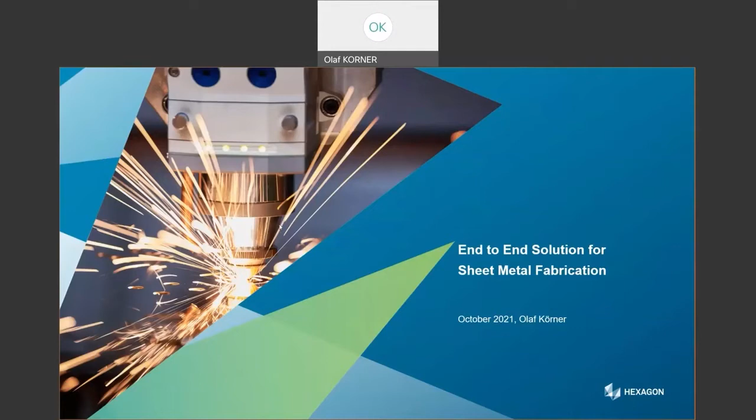So what are we going to go through today? First of all, I'll explain who we're aiming this at, who should be listening to this and who should not be. Then we'll look at the business challenges that we find as Hexagon in the sheet metal world. And then we'll show you how we are trying to address these issues using our product portfolio at Hexagon. Then we'll do a quick recap over the actual products you've seen in that end-to-end solution. And we'll talk through some of the key benefits you'll gain from this solution.

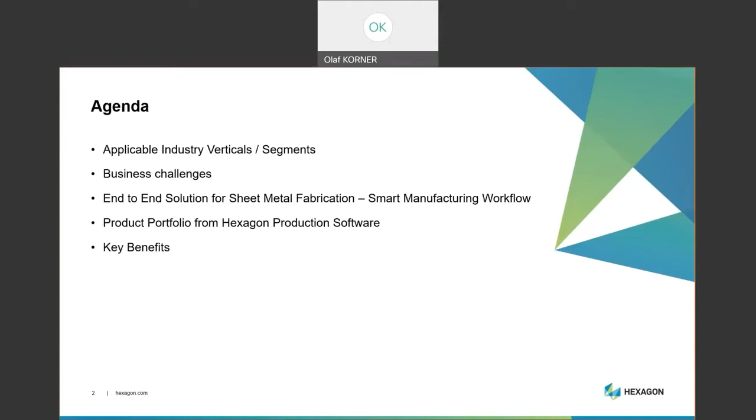So, who is this aimed at? Who are we looking for in the market when we talk about sheet metal fabrication?

Just check, I think there's a message coming in. Okay, who are we talking to? Hope you can all hear me, by the way. I'm just checking whether there's any messages coming in.

It's looking good. Okay, so lots of our customers are in, for example, industrial equipment, such as kitchenware, air conditioning, air cooling and heating, general electronics enclosures. We're aiming for those. Another large group that we find is agricultural equipment and automotive. There's a big group of our customers in that area. Aerospace, of course, medical equipment, oil and gas, and not to forget anybody who's subcontracting in any of those areas, we're looking after as well with our end-to-end solution. So quite a broad spectrum, but they're basically combining sheet metal or tube parts into assemblies and finished products. That's who we are trying to serve.

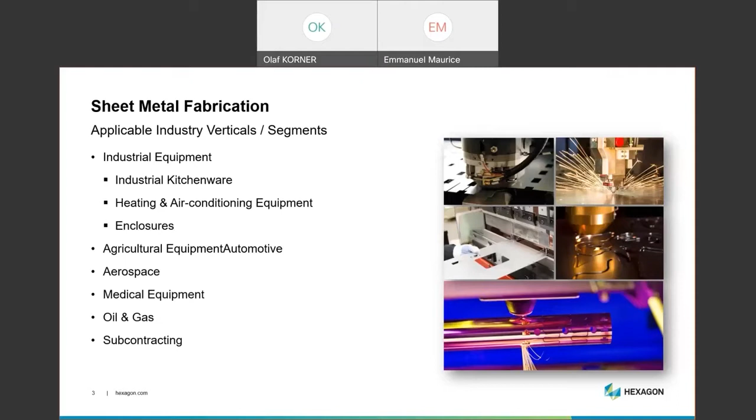So when we look at this manufacturing world, the sheet metal fabrication, we see all these business challenges coming up. We all face shortened lead time. We try to reduce prototypes. We try to eliminate manual operations and free up human resources through automation. We try to reduce rework, so increase the quality or make sure that the quality is predictable and consistent. We try to capture a lot of the skills into our software from the people, so that this skill can be transferred successfully to other members of staff. And also we see that in the sheet metal world, people have to respond to changes very, very quickly. All our solutions are trying to address these challenges and help businesses with them.

And in the sheet metal world, these challenges come up in different forms. So we try to listen to what you're dealing with, what you're trying to deal with, and come up with solutions that genuinely help.

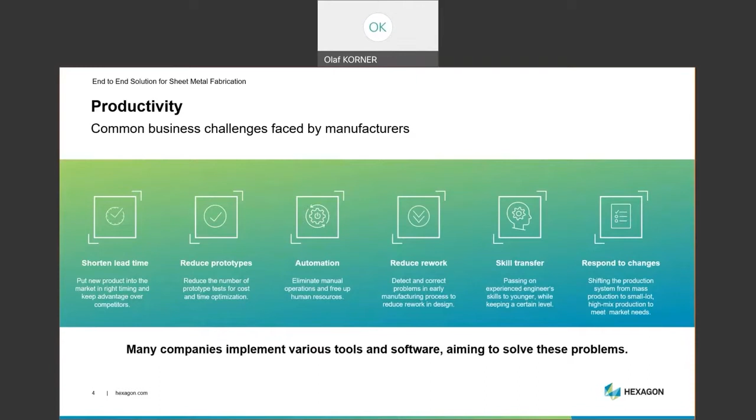So when we talk about this end-to-end solution, we have the following in mind. We're not just a CAM system trying to run your machine. Of course, that's where we come from, that's where we have a large and big experience. But we're trying to capture more of your workflow and help connect those workflows together.

So when we talk about the end-to-end solution for sheet metal fabrication, we do include the first moment a project comes into the company. That could be a phone call, it could be an email with some 3D files or 2D files and a description. Something enters into your company, and we use WORKPLAN to capture that information. Who sent it to me? What did they send me? Did they send any geometry, any files, any indication of a lead time, any quantities, any particular material requirements, anything that's useful to capture at that early stage, we're trying to capture in WORKPLAN. Just to make a record of what's happening.

And then we start preparing for manufacturing. Now, the initial preparation is to see what the customer's actually sent us. Has he sent us DXF files, DWG files, step files? What have we got, and can we do anything useful with them? We try to analyze that as quickly as possible using our product called Designer, just to see whether we need to ask the customer more questions or whether we can actually make a judgment on whether we can do the job.

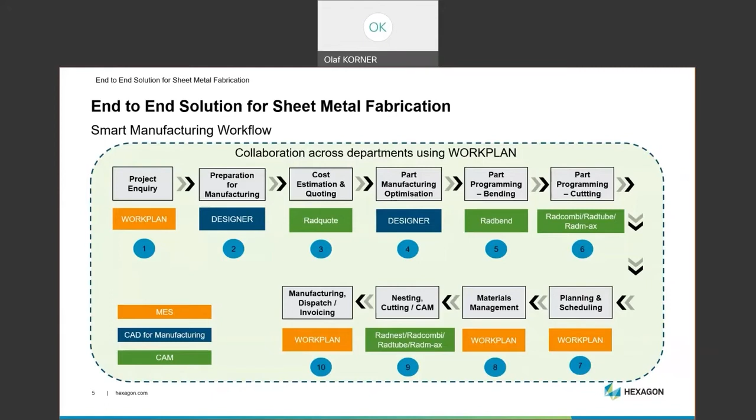So, Project Enquiry - this is like I described earlier. We receive something, I don't know, it's a phone call or an email, hopefully with some geometry, even more hopefully, and any indication about materials, quantities, any constraints. Maybe the material has to be absolutely scratch-free, or anything the customer has told us, including anything about the due date that he is expecting. All that is information that we need to capture.

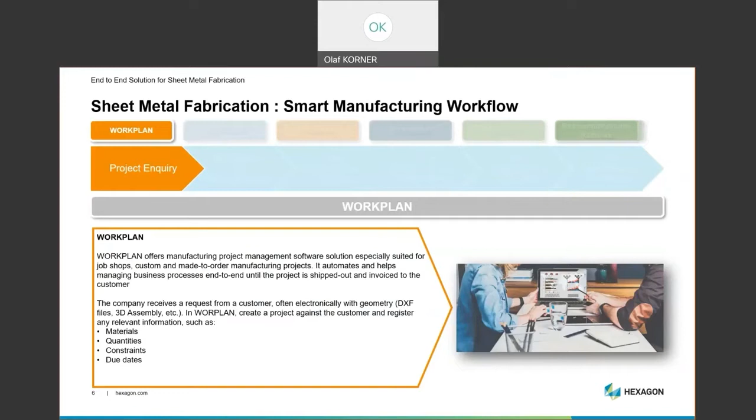And we do that as soon as possible inside WORKPLAN, so that everybody in the organization automatically knows that this work has come in. We haven't analyzed it yet, but somebody is talking to this customer and working on it. And this is a video of what this looks like.

So this is where the project inquiry comes in. We're starting up the WORKPLAN software and logging in. Then we create a project structure, and the most important thing here is choosing the customer we're doing this for - it might be a new customer or an existing customer, it doesn't really matter.

Okay, and maybe the customer's given us a reference number that we could use and refer to. And we're going to take those and assign people to look after this project. The sales manager checks the shipping address, or if necessary, updates it.

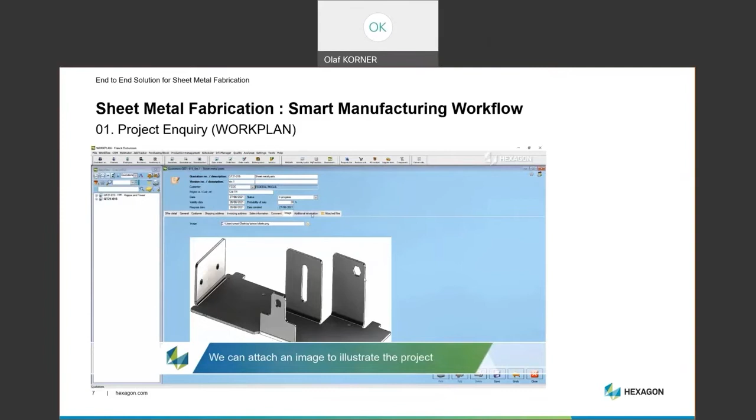And any comments that we can add, so maybe the customer has indicated something about the project that we didn't know about. Anything that helps, we attach - any PDF files, any files that have been sent, any images that will help us recognize this project. We add these, and we can customize these fields as well. If there's anything important to track during the run of this project, we can capture that.

Okay, so we're quite flexible. It's a database system that can be configured to suit you. So that means we now have a project on our hands, and we've captured all the information in WORKPLAN, and we can continue - we can investigate and see whether this project is worth pursuing for us.

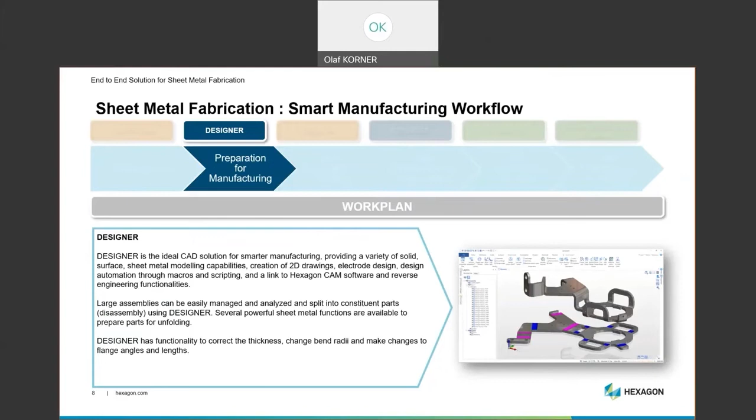And that's what we do in Designer. We try to graphically view this project, and in this case, in the screenshot, you see a single part, but it could be a large assembly, a medium assembly, an assembly with sheet metal parts, but also with tubes or any screw fixings. It doesn't really matter what's in there, but we want to have a look inside Designer to see what the customer sent us, to see whether we need to ask additional questions.

That's what we call preparation for manufacturing. Do we have, in theory, the information that we need to produce?

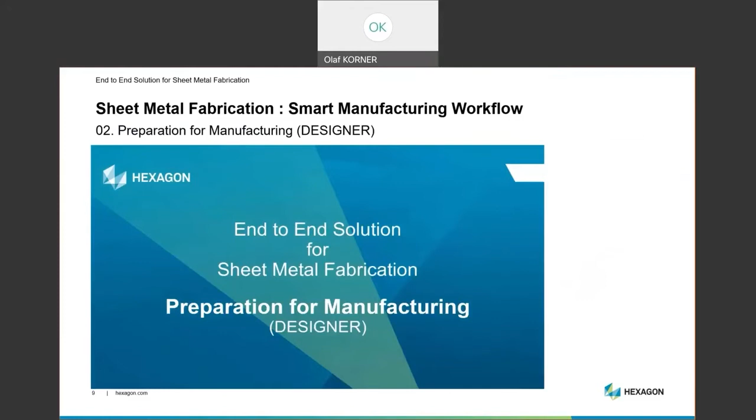Okay, and in this case, we've made an assembly with a hopper and a tower, tubes, plates, fixings in this assembly. And Designer is really good at tidying up and analyzing the structure of this assembly. So even if I have to manually change some of it, I can very quickly focus and create sub-assemblies, so to speak, in Designer to help me manage the information in here.

Okay, what I'm going to do here in the example now is just focus on some of the sheet metal items and make sure that they've been designed properly, that I can unfold them, etc., just to eliminate any problems very early on.

Remember, this is just at the inquiry stage. We haven't told the customer that we're going to do it. We haven't told them how much we're going to charge them. This is just investigating whether we have something on our hands that we can work with.

And that includes the materials. Okay, we need to look at these parts with their material information and see, okay, we can make this material, or maybe it's too thick, or maybe we've never cut this material. Okay, we need to know this up front before we tell the customer, A, whether we can make this assembly for them, or B, even how much it's going to cost them.

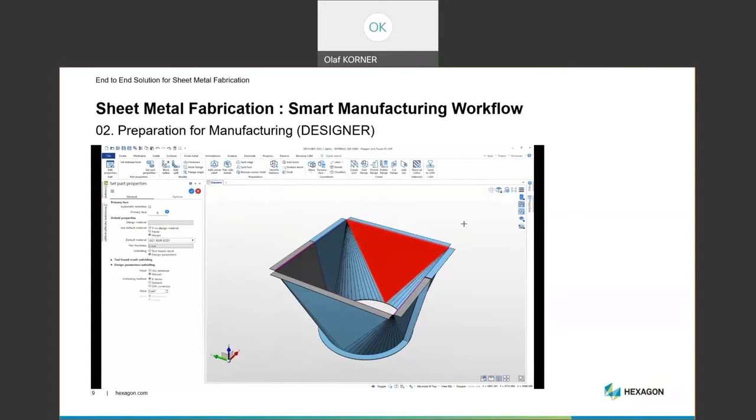Okay, and that's what this stage is about - just indicating and showing and checking what we've received. And the more the customer puts in, so if he sends us a SolidWorks file or a step file with all the materials set, then we will use that. And if we've set up the Designer system in such a way that matches what the customer uses, or roughly matches, then we can automate all these steps.

Okay, and then this step is just a button click away, and it gives us any messages about problems that we might have. Okay, so this is just a check of some of the parts, just to see whether they unfold correctly, because these cones are usually the difficult ones to work with.

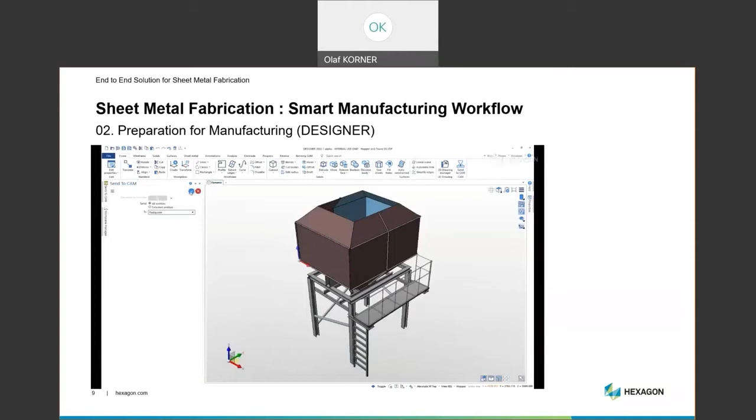Okay, and when we're happy enough in this assembly, we can then send the data into Radquote. And Radquote is the system where it's just going to have a good look at these parts and see what it will take to make these.

Okay, Radquote is made for sheet metal. It handles tubes as well, and it can work with consumables. It can work with manual parts, etc., and any operations that have to do with sheet metal fabrication, welding, inserts, etc. So Radquote is really focused on the sheet metal world, and you will recognize that when you use the system.

There's important work that happens here in quoting. Not only do we get a graphical bill of materials, we also get a bill of work. The assembly is being analyzed - all the sheet metal parts know that we have to get material for them, cut them, bend them. That's the sequence for these single sheet metal parts. And that means the software can calculate cycle times, handling times, and material costs fully automatically.

You can see that it's actually trying to nest these parts together to calculate the best sheet size to use, to get a competitive quote out to your customer. It's very important because we can get an accurate cost, or a high cost and never get the order, but it's important that we get a competitive cost.

The other things that happen in here - tubes are not alien to Radquote either. We can add all the tubes in here. The operations may be different, but we still need to buy material. To calculate the material cost we use the same nester, so the process is exactly the same whether you use sheet metal, flat parts, or tube parts.

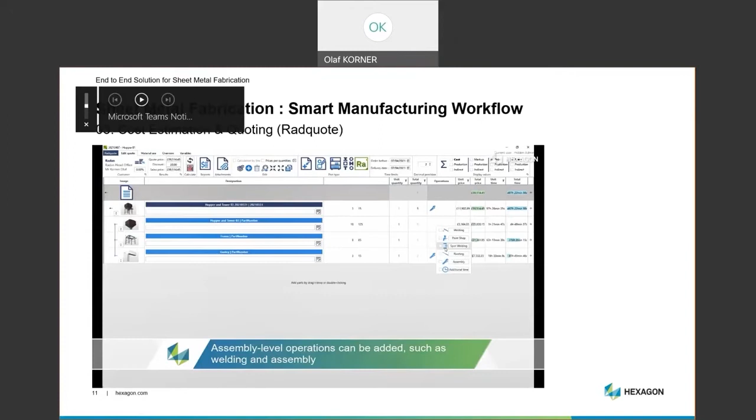So, sorry, I lost the sound, I think. I'm back. If anybody can send me a message that I'm back, that would be greatly appreciated. I'm back, thank you Gavin.

What is happening here is that Radquote actually understands the assembly and all the operations that go into putting this assembly together. It's not just the parts to be made, but also the assembly and the delivery, and everything that goes into getting this assembly - I think I've ordered 15 of them - to get to our customer, everything included, including shipment. And that goes back into WORKPLAN, because WORKPLAN also needs to plan in the welders, the materials, the shipment even. So everything goes back to WORKPLAN, and that's how it all hangs together.

So, like I said, hopefully by this time we've worked in Radquote, we've given the customer our best price, and we may have negotiated here and there, and the customer has placed the order. And now it's up to us to make sure that we make as much money out of this as possible.

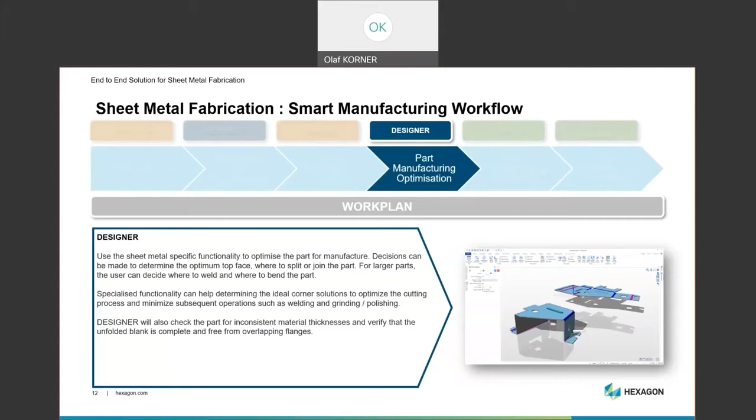We go back to Designer and see if we can optimize, tweak the parts in such a way that they are manufactured in the best possible way. It could be a simple way of just slightly changing the bend radii so I can use standard tools, for example, or it might be deciding that if we make these two parts out of one part, we can actually save welding time and polishing, grinding, and everything else. So it's important that we go over this again and make sure that we get the best out of our sheet metal design.

That's what's happening in this video - in Designer again, we have a look at the 3D parts in a different close-up and see if we can improve anything or whether anything needs to be changed for manufacture. It's just checking whether we can do anything about that form, whether these faces are in the right place.

But what I'm going to do here is have a good look at the bend radii, for example, or at the form first, I think. Yeah, form first. So that's a form, we know that, that's fair. And Designer can handle many file formats - SolidWorks, Solid Edge, you name them, we read them. And you can all immediately work with them, and that's very attractive.

Now, Designer won't actually continue if you don't have the material or thickness available, so it's another check whether we can promise the customer that we will do this.

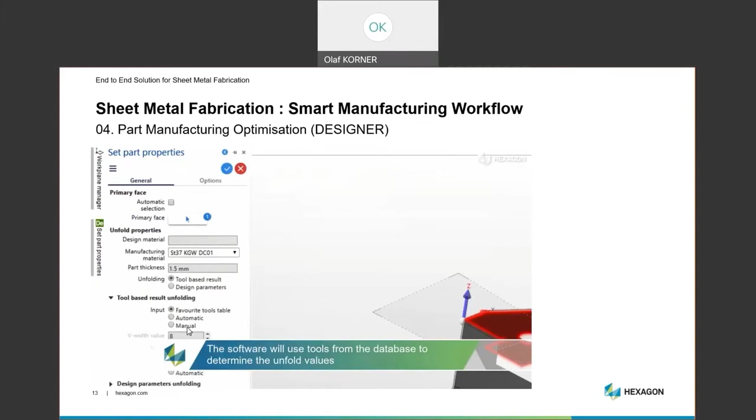And then for unfolding we can specify - you probably know about this, a K factor, for example. But if you want, and all you know is that we're going to use the 8mm V for the bend, that's also fine. You can tell us and then we will calculate, for example, the K factor from that.

But we will also check that the radius is roughly what you thought it would be. In this case, the radius was designed as 1.5, but with an 8mm V, I'm going to get a radius of 1.9. Now for me, creating a 1.9 radius is perfect because I don't need to buy extra tools, but I should really ask the customer quickly and see if that's still okay.

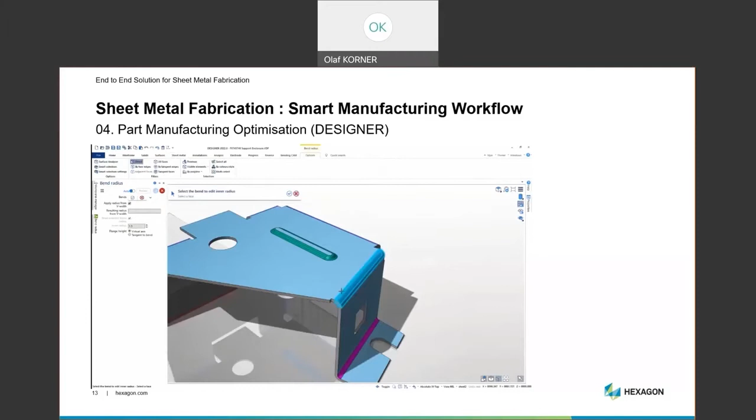So that's where we can see whether what we're expecting to get is actually real, without involving a press brake as such. We haven't configured any tools in this system just yet. This is just verifying whether we can actually make this.

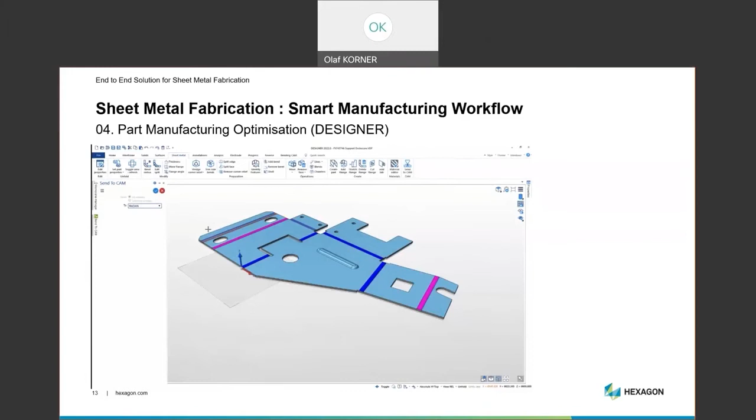And then to have another look at that big assembly, we can do the same thing in assembly. It's very simple—we just look at and isolate, in effect, a single part. Very quick.

Just select the part, you can focus on it, and even though this was a step file, you can make minor changes. For example, this corner here—I could see that would be a nightmare to weld shut.

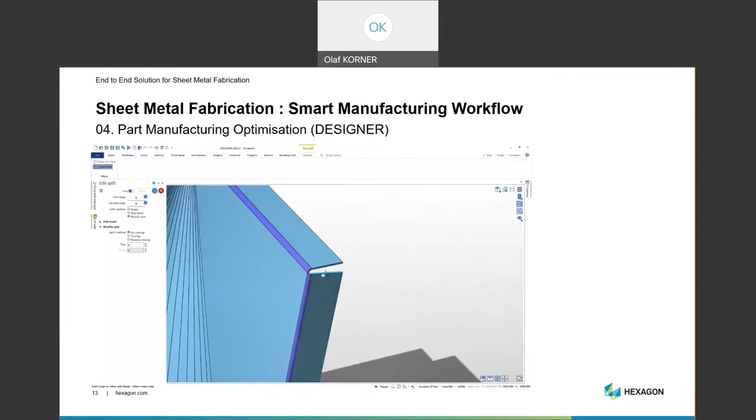It's very easy inside Designer to change that corner. Just by modifying it, we could choose a different overlap, tidy it up completely, and that's now a lot easier to weld on the inside and keep tidy. So even though it wasn't a model that we made in Designer, we can easily change it. It's extremely powerful and quick.

And we can create the new unfolding after. So it could be very worthwhile to just check the designs and optimize them just like that.

And also, if the customer did phone up and said, 'Oh, I've changed my mind about these corners,' it's very easy to change them inside Designer. Reacting to changes is very quick. So then I would say that part is now ready for manufacturing. We may have made a quote for it, and now we've got it ready the way we want to make it and the way we can make money on producing this part.

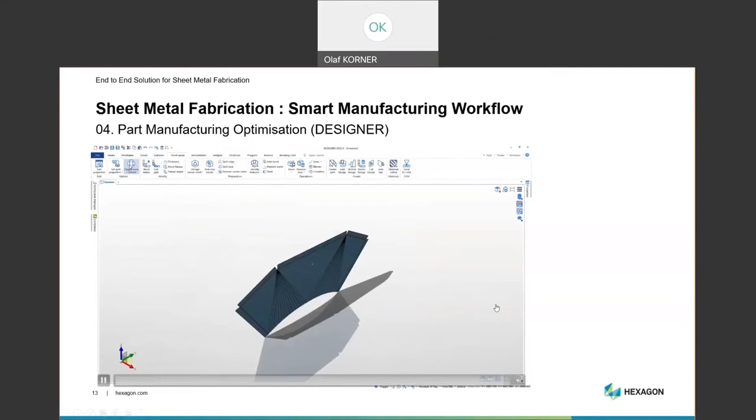If you haven't already, I can recommend looking at Designer. Actually, it's a fresh new approach as a design tool for manufacturing, especially in sheet metal. We're very pleased with it.

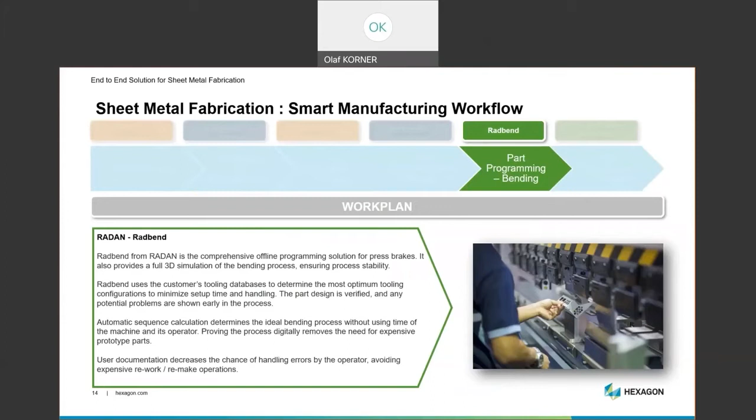So from the assemblies that we've just seen, we're going to prepare and make sure that we can really bend it, so that we're sure that we don't need to buy any tools, or maybe we do, but we do that beforehand. Make sure that there's a sequence that's valid, and just make sure that everything's in place for the press brake.

And the nice thing of doing this inside Radbend, what we're showing here, is that you don't have to stop the machine to do this. You can actually prove it out inside a bit of software, tweak the design if necessary, try again in Radbend to see if you can find a sequence.

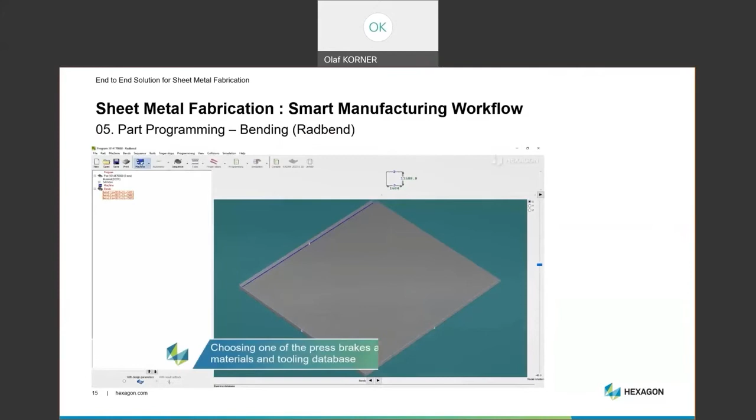Because it'd be really annoying if you've cut 100 of these panels, and they're quite large, and then find out that these flanges are actually too small, too short. So it'd be really good to find that out as early as possible.

So inside Radbend, what we do is we choose a machine tool, we choose a sequence, calculate a sequence, taking the tools into account, the tool database. We calculate the tool stations that we might need. And we place the finger stops, even if it's clamping finger stops with multiple faces—we place them automatically if we can.

And the best thing about the Radbend software here is a full simulation. What it does is check collisions with any part of the machine, or actually anything that you model in here—it could be the controller, it could be the lifting arms, it could be anything that you can see. We simulate to make sure that this process is going to work.

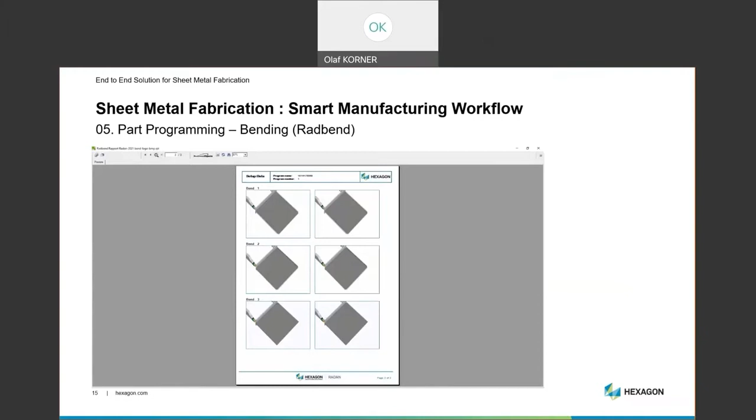And we prepare not just the NC program for the machine tool, but also the documentation for the operator. So in theory, this is enough to run the machine tool. You don't strictly need a post-processor. You could set these up with the values shown in the report, set up the machine tool, and you know it's going to work without disturbing the press brake or cutting any prototype parts for that matter. All in software.

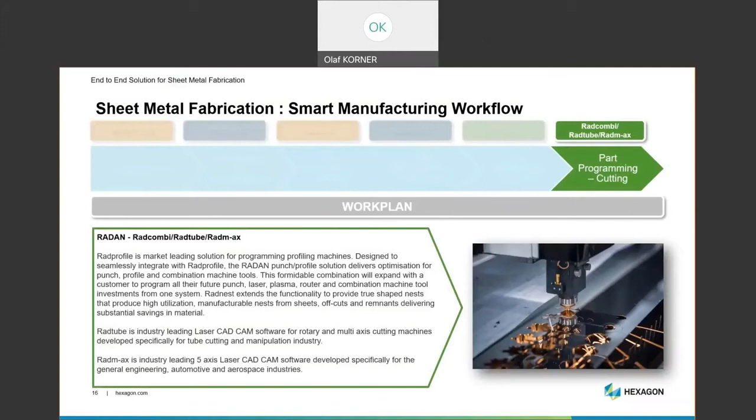The same thing might apply for cutting. We've just prepared it and checked it for bending, but we might want to have a good look at it from a cutting point of view. We do that in the RadCombi or the RadTube software just to prepare.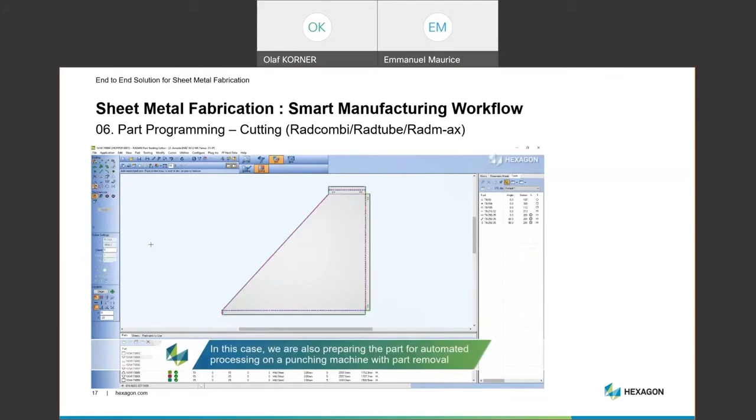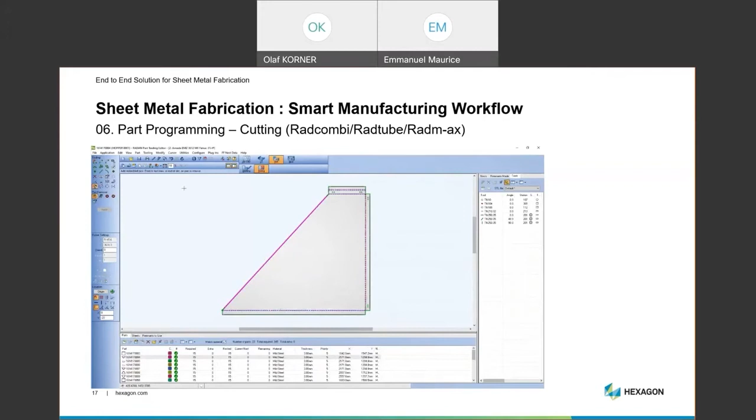So that's for profiling. We don't have to do all that, but we can add information. For this Amada automated machine, for example, we choose the tools that we're going to use. Maybe we'll choose micro joints, but in this case, what we do is we use the part picker on the machine. We just specify where the arms should go, make sure that the key suckers are active and on material, and find a good spot to lift out this part. Now in tubes, we have other ways of preparing the parts.

The same things apply, heat buildup and sequencing and collision checking. But what I'm going to do here in this little video is add what we call tenons, because this ladder needs to be put together by somebody in the end. These tenons help greatly to make sure that we do this in the right way.

So the tenon and the hole is marked with a little A. That means that the person assembling the ladder later can only put the ladder together in one way. It's just little things that we can do to make sure that we have this fabrication process under control and do it as well as we possibly can.

So by using an A on one side and B on the other side, there aren't many ways we can get this wrong anymore. You'll also notice, hopefully, that I put them on asymmetrically, so there literally is only one way to put this ladder together later, which will help.

Also these tenons are quite handy because they reduce the requirement for fixtures whilst you're welding it together. You can stick it all together and then tack weld them and get the assembly in one structure.

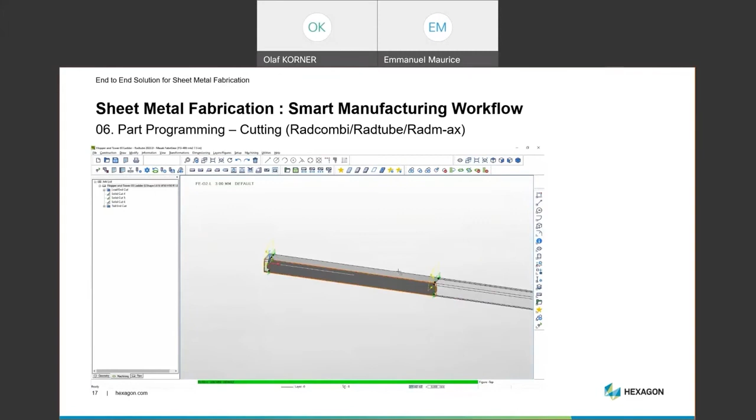Also here, we're going to have a look and see how this is going to be cut off, because cutting off non-circular tubes isn't always obvious, since the thickness changes and everything. We can simulate the whole process, the entire process, on the machine, just to make sure that everything works properly.

So again, this is just proving out and deciding and optimizing how this part will be made. You saw me not even talk about how many we're going to make, for example. There's no nesting, etc. Nothing's happened yet. It's just deciding how best to make these parts. We're still in that top banner of the workflow, so to speak.

Like I said, hopefully that's been happening all day. Orders have been coming in, requests have been coming in, you've been detailing and optimizing these parts, and at some point somebody in the planning and scheduling department will say it's time to do some cutting, otherwise these parts are going to be late. Now the nice thing about doing it late is that you might be able to combine orders really nicely, and therefore optimize your material. So WORKPLAN is an ideal planning and scheduling tool to do this in.

So that's what we're going to have a look at. We're back in planning and scheduling, back in WORKPLAN. There we see all the open orders. Now we're going to focus on the hopper and tower because it's quite a large job with a large quantity. But we can specify the exact workflow even further and see all the dependencies as well. There's no point cutting half of the panels and then trying to assemble it, or we could assemble the ladder completely and the frame completely without cutting any sheet metal parts. So that's what's happening here.

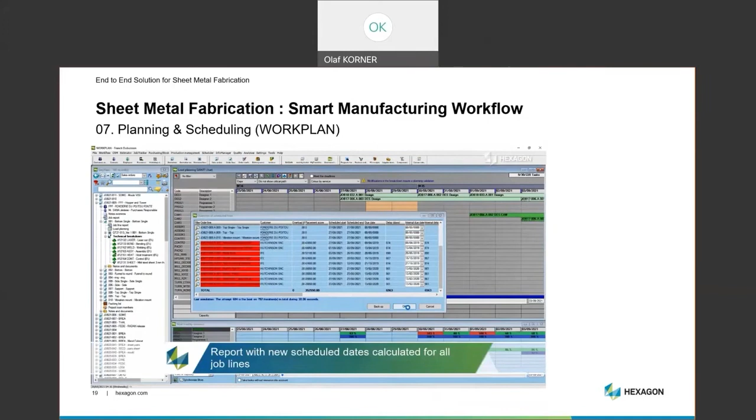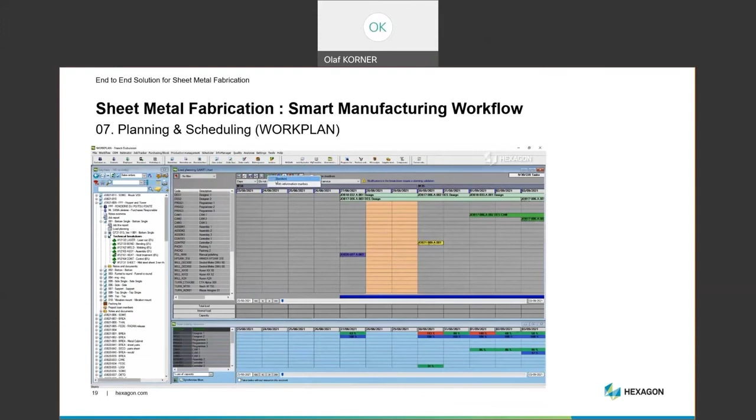We're literally loading it up into a Gantt chart and running the scheduler, trying to simulate the job and predict what's going to happen. You can see in red some of the orders might become at risk, so it's a very useful tool to see that up front. Per resource, whether that's a machine or a team of welders or a team of assembly people, we can see exactly what their workload is. You can see their daily plan.

Okay, we can output that as Excel files, or we can share that in other ways, and we can see exactly how busy certain teams or resources are going to be during the day. Make sure that the schedule fits.

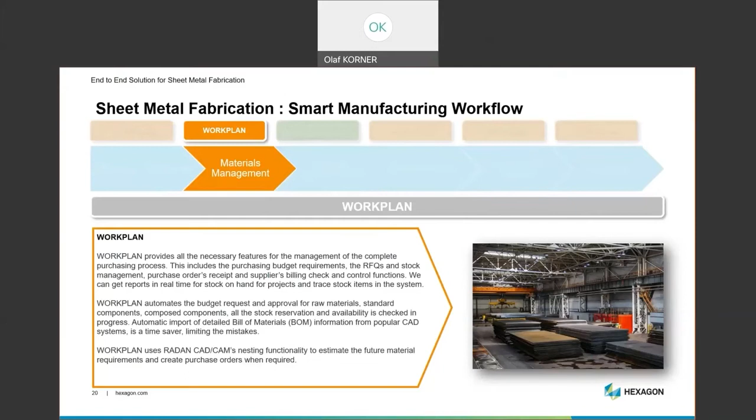So once this schedule, this plan has been made, we now need to look at our raw materials and see which process, which flow fits best. Before we launch an order into production, we need to make sure that we have the material. WORKPLAN has a useful tool in place to predict how much material we need. And because WORKPLAN is a manufacturing execution system, placing an order for materials that you don't have, or running low of, is inside the same system.

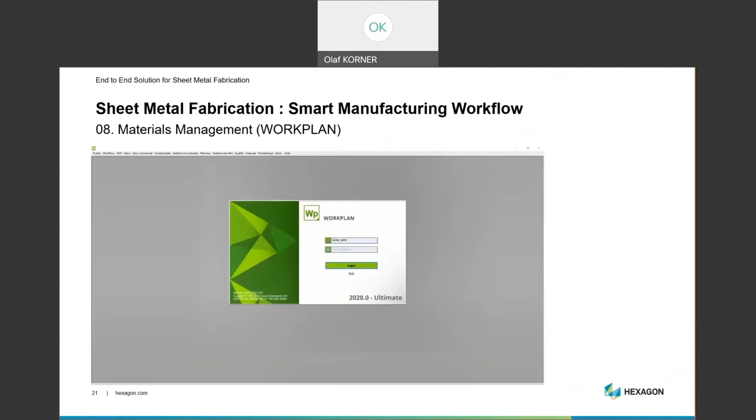So any projects that are ready for production can run the sheet metal requirements estimation. So anything that we've released, we can have a look. And it's using the RADAN nester in the background to try and predict how much material we'll need per material and thickness.

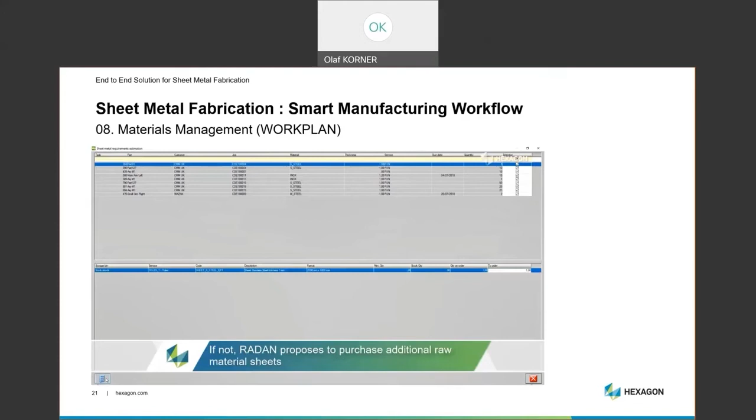And if not, RADAN will tell us which sheets we'll need to buy. Creating a purchase order inside WORKPLAN is literally no more difficult than dragging the material requirement onto the purchase orders, print off the purchase order and send it. You can actually email it straight from WORKPLAN to your supplier.

Now we know that WORKPLAN has made sure that we have enough work for the day, for the machine tool, for the resource. We have the materials in stock. And this is where we now start doing the technical CAM side, so to speak. It's where we do the nesting, in effect.

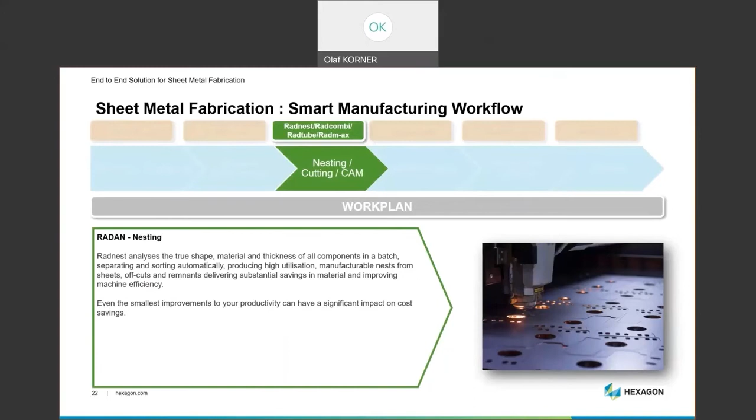So what WORKPLAN will do is prepare a list of work for us to do, and we can choose how this comes together. So in this case, loading up our hopper, RADAN automatically extracts all the sheet metal parts, sets an overall quantity, sees how many we're making. There we go - all the parts end up in our nesting environment.

Now, how these parts end up here varies greatly per company. WORKPLAN can send them, you can add them manually, or you can add them using different links to MRP systems. It's very flexible. But with WORKPLAN, you get not only the part requirements, but also the available materials and sheets. Everything is then followed through.

And in the Nest project, what you see up front here, you will also see the order numbers, the customer names that you're making these parts for. And using our nesting algorithm, RADAN will very quickly work through all the parts that are required and calculate which sheet sizes and what nests we need.

Actually, for this Mazak Optiplex, I've optimized it such a way that everything happens automatically. It actually outputs the NC programs ready for the machine tool, so full automation was switched on. It automatically scraps remnants or cuts remnants apart, stores them for later, and calculates an overall runtime.

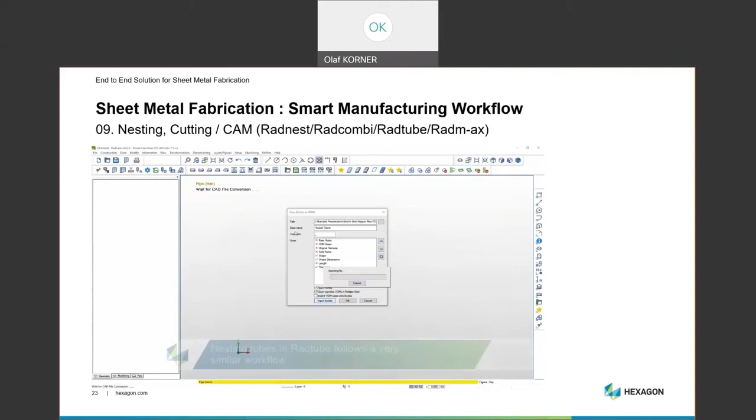Now, that was for sheet metal flat parts, but for tubes, it's a very similar workflow. We open the hopper, so to speak, and then it's RadTube who analyzes the tubes that are required - what shapes they are, what lengths, what materials, which go together. It disassembles them into individual items and parts.

For every shape that it finds, it asks me a quick question about what strategy I want to use for cutting, so we can increase the automation. But the assembly is disassembled completely autonomously. With the automatic shape recognition, we can be sure that only the tubes that belong together are nested together.

Okay, so that's the part requirements. Again, we see all the order numbers and customer names against the part if we need to. We get all the stock, the raw material shapes and sizes, into the system. And the nester very quickly works out which parts should go on which tube together.

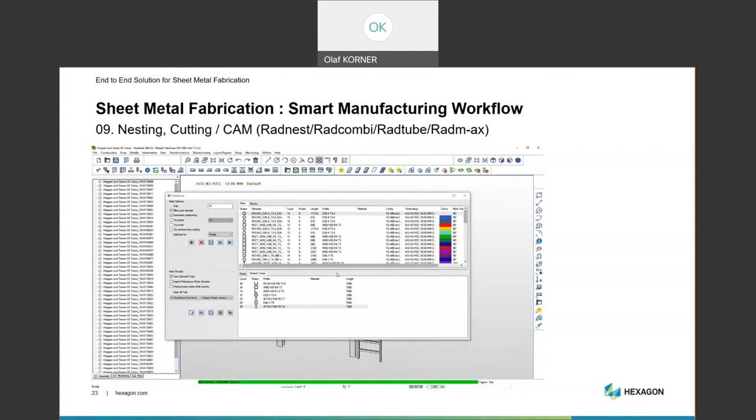Similar to in 2D, we've prepared the NC programs and the setup sheets for the operator in the background, so they have everything they need to run our production. These are the individual nest jobs that have been created.

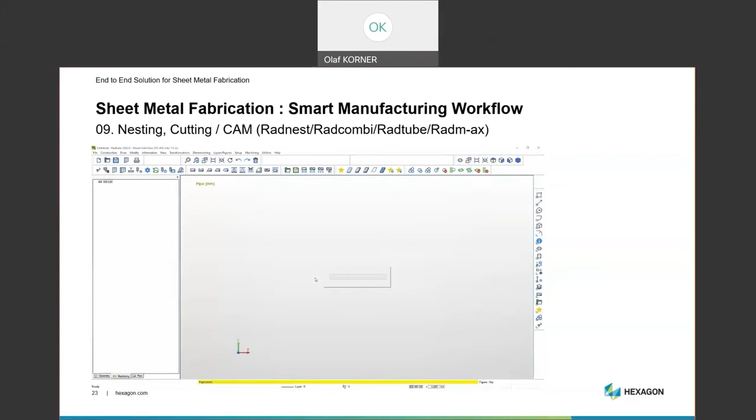Let's optimize the cutting sequence to make sure the handling in the machine is done properly, that the material, the heat buildup is under control, and everything else happens automatically in the background.

At any point, I'm free to have a look at the results simulated with the entire machine tool. No issues with that, but RadTube and RADAN CAD/CAM both offer a huge level of automation.

So WORKPLAN is actually keeping track of all our activities, everything that a machine or a person actually does. We can install touch screens, barcode readers, time cards all across the company just to keep an eye on the production and the progress of our production.

WORKPLAN is keeping track of everything, and it doesn't need to be sheet metal operations. It could be anything, it could be assembly, it could be anything you like. WORKPLAN can manage the time and cost implications. There's a few reasons why this is important.

So if we work from a RADAN schedule here, I'll show you how WORKPLAN manages these nests, not only inside RADAN, but also across the shop floor. Let's create the nests.

Fantastic. Any remnants are managed as well. They're also put back into WORKPLAN just to be managed and accounted for. It helps with cost calculation.

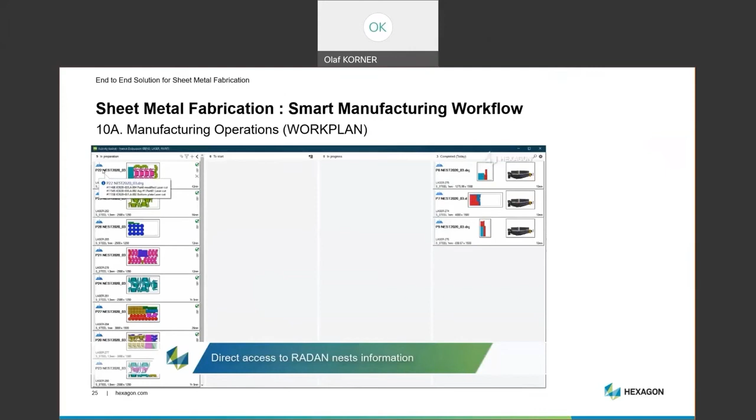Now, when we run these, we can assign them and say, okay, we can still change the sequence, for example. So in this case, we're picking up a nest. We can view it, have a look and see what parts are on there, which jobs are being covered by this particular nest. All the details are visible in there.

We can print up a setup sheet or nest detail, even with a barcode on them. And then what happens is, this could be on the shop floor, this could be in an office.

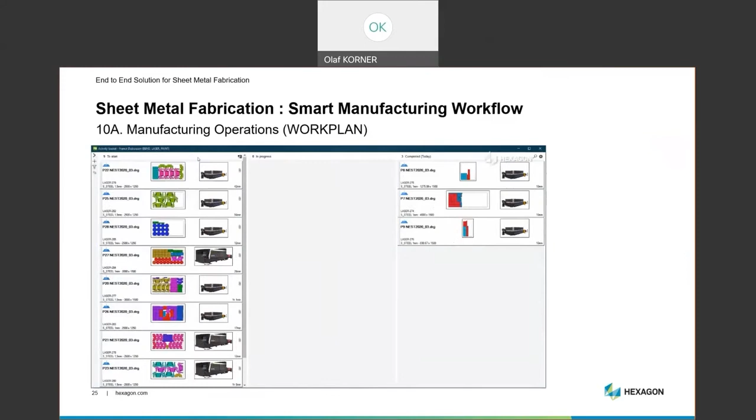We can put them ready to be started. So this for a particular machine tool, and for a different machine tool, we can line them up, and that appears on the controller next to the machine as well, so they can see the sequence in which they're required or requested to run these jobs.

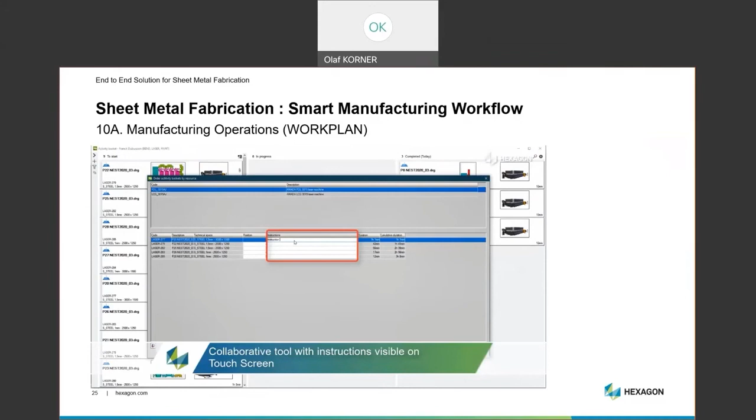This is how you can see the sequence, for the Amada FOL, for example. You can leave extra instructions, for example weld immediately or package carefully, things like that.

Then we can specify that the job has been in progress, and we can see and monitor the realized time, the real time. And when it's completed, it's not just a matter of saying that it's completed, but also confirming the real time it's taken, and whether there's any rejects.

So the nest and the machine might have cut everything, but you might reject one of these parts, and the system needs to know. The nice thing about WORKPLAN is that it will immediately become an item to do in WORKPLAN, so we can see constantly what happens.

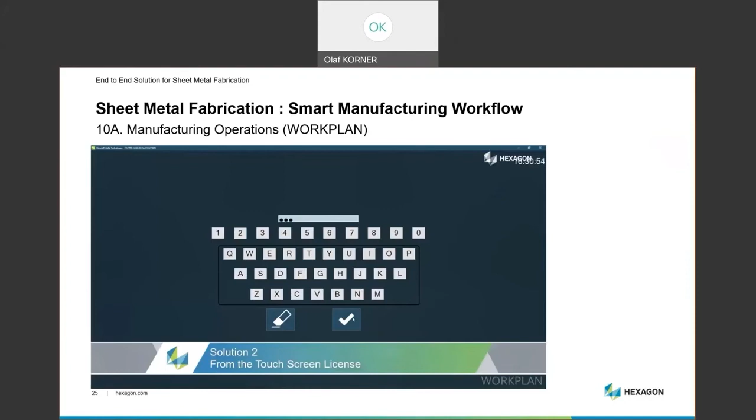So that was within WORKPLAN, but this is a screen next to the machine where we can see what nests we have to do today. So there they are, P20 and P22, they're for my machine, the FOL. I can specify that I'm now going to start or find a particular one.

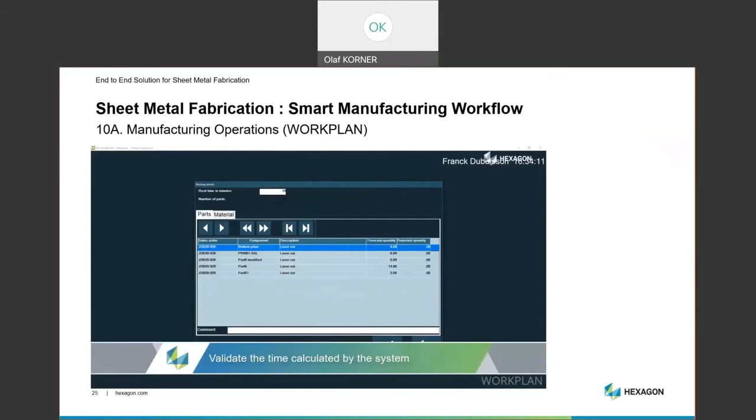Scanning a barcode is always quicker, obviously. You can see the instructions that we just added, and then we can feedback. This is a screen that you would typically find next to the machine, so on a tablet or a touch screen. Whenever the user says that the nest is completed, it's automatically updated inside WORKPLAN.

So whoever looks at it in the company can see immediately which nest has now been finished, how long it took, and that also gives you information about how long it took to cut the parts, or even just the status of the parts. So if your customer phones up, you know immediately. You can tell them, well, okay, we've cut 50% of them, you should be okay for 4 o'clock, for example.

So WORKPLAN can also manage your inspection process. There's a quality management system inside WORKPLAN that can manage your results, your feedback, any issues, any rework and remake, and quality indicators inside WORKPLAN, and get everything ready for dispatch.

This, for example, is for the shop floor operator. It automatically calculates who it is, how long it's been working on this, etc. He checks the job and checks and verifies that everything is in order.

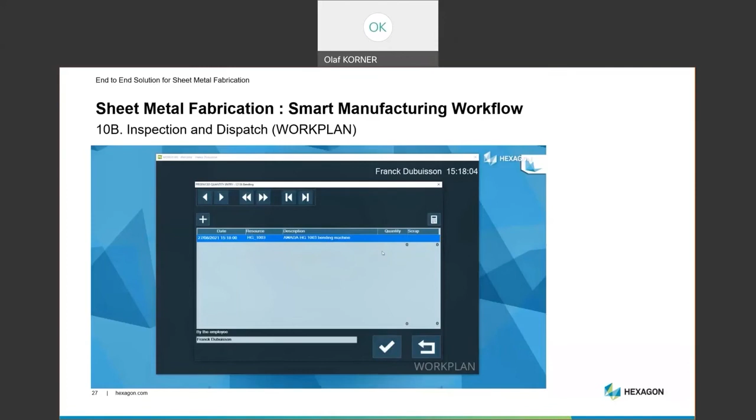At every stage, whether that's the cutting or the bending process, any operator who's responsible for a certain job can specify how many were made or how many were scrapped. Any quantity and any progress is automatically always constantly updated inside WORKPLAN.

There we go, go back to WORKPLAN. You can see that there's been one part that has been rejected.

So when you're satisfied that everything's there, everything fits and everything's put together properly, you can print the delivery note to go with the package.

Everything's logged. You can send the email straight from WORKPLAN. You saw that I don't even have to type in an email address - we know who to send this to, this invoice, this delivery note. Easy as that.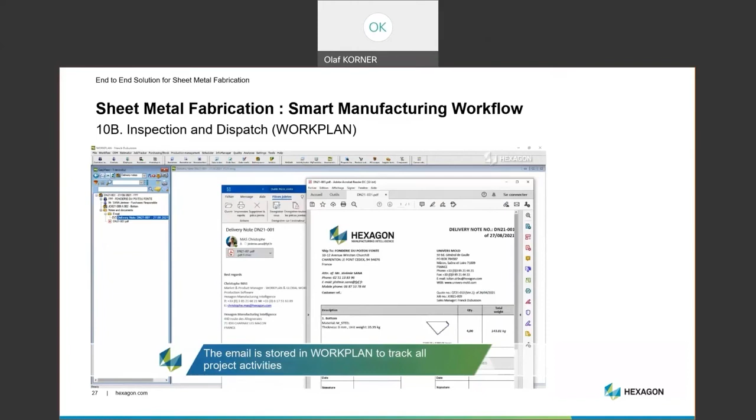So WORKPLAN also issues the invoice if you want to. It can calculate and keep track of all the invoices that you've got outstanding, etc.

Okay, still our hopper and tower, when we started off at the back of this journey, hope you remember. Now, what also happens in WORKPLAN, that's quite a useful feature, is that you get feedback about how you actually did on this job. How long did it take? How much material did we use? Because you might have made a few scrap parts, and it breaks down exactly how much you've actually made on this particular job, time-wise, material-wise, the real income, and compares that to your targets.

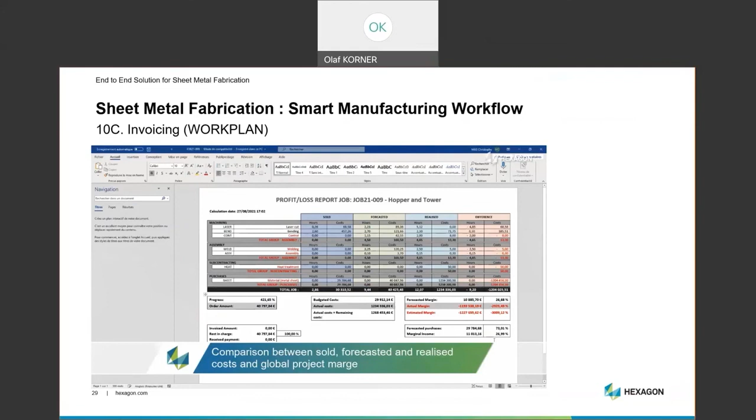So what you can do with that information is maybe adjust your quoting strategy in the first place. It tracks everything, and that's all for good reasons. Now at the end, we can print and send our invoice to the customer and track whether that's been managed.

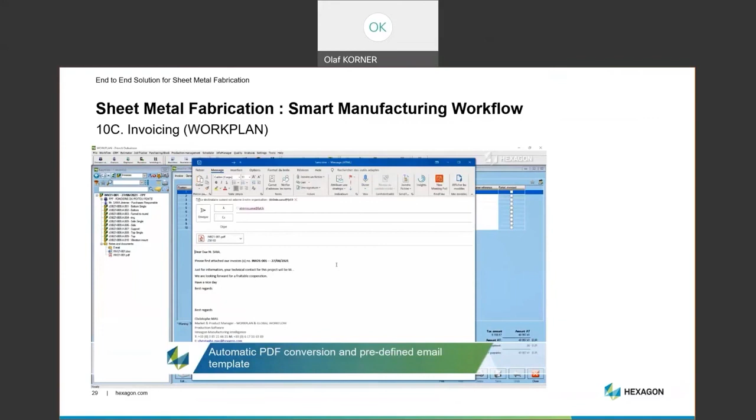The nice thing again about WORKPLAN is any employee can see this information. They can see the progress, they can see the real value that's been generated, they can see whether the customer has been sent an invoice or not.

Everything's visible in one system. Nothing escapes the process, so there's no more asking whether anybody's sent the email yet with the invoice. No - we can see who sent it, we can see what time they sent it, etc. So we know exactly what's happened all the time.

So that's the complete workflow from initial inquiry - I hope you remember all the way back where we got an email from a customer with a 3D assembly. We analyzed it, we prepared it for production, we planned it in, we scheduled, we nested, we cut, we invoiced right at the end. Now the products you've seen, the product portfolio we use to do this - first of all, WORKPLAN, that's the big umbrella, so to speak, that keeps track of everything that we do and need to do.

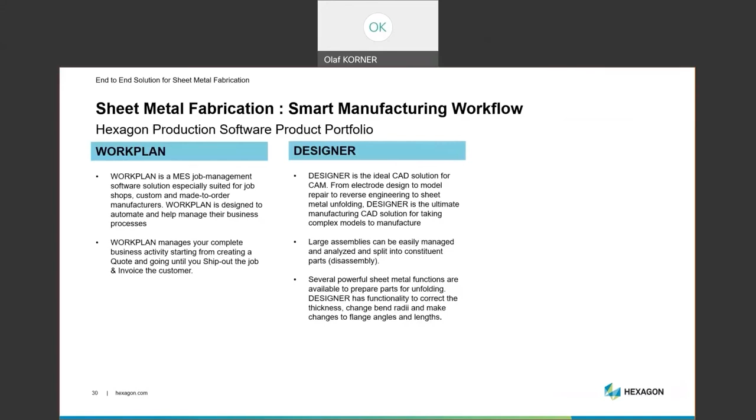Then we use Designer to make sure that we do everything as optimized as possible, that we get the best parts out to the customer. We use RadQuote to estimate the costs and calculate the price and work on with the customer to gain the order.

We then use Radbend to prove that we can bend the parts before we cut any prototypes or disturb the press brake operator with this work.

We use Radcombi and Radnest for the cutting and nesting operations for flat sheet metal. I said Radcombi here, but it includes Radpunch and Radprofile, depending on what type of machine you have. We use Radcombi machines for customers that have a combination machine, so laser punch, or that have two different machines.

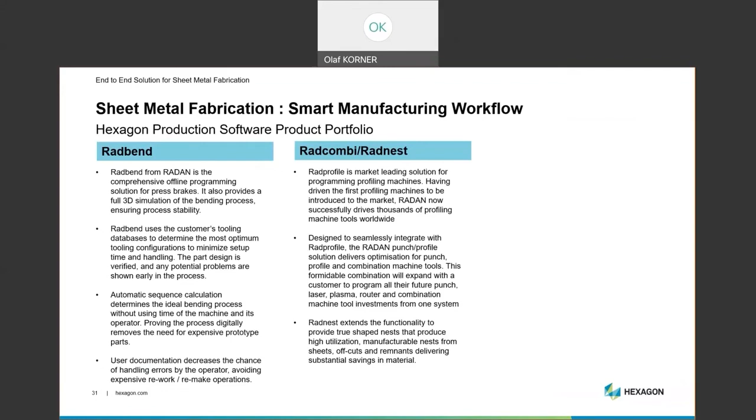Radnest is the engine that makes sure we get enough parts, or the maximum number of parts, out of our raw material. Then there's Radmax and Radtube. Radtube is the tube cutting software, and Radmax, which we haven't covered so much, is more for 5-axis laser cutting parts. That's a small segment of our market, but tube is becoming very common where we are.

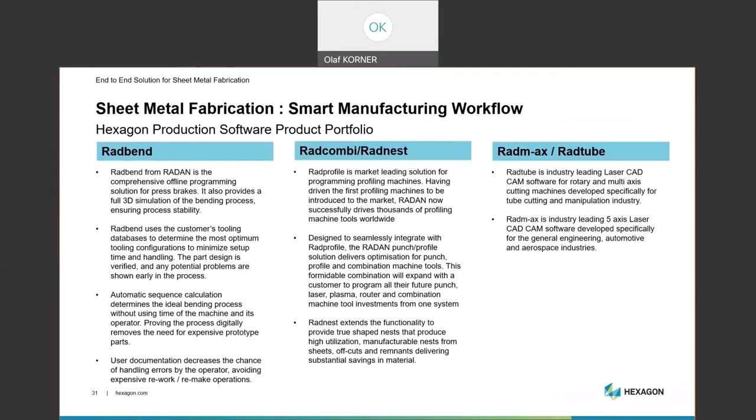We automated some of their work to do this. This was actually a couple of years ago, for the Olympic Village in London when the Olympics were there. We did some architectural work.

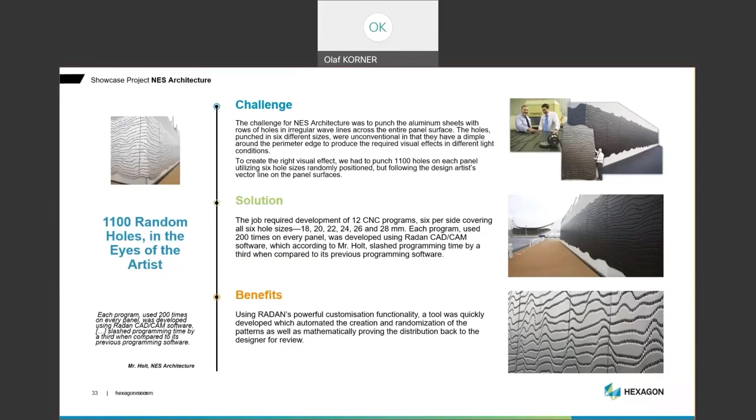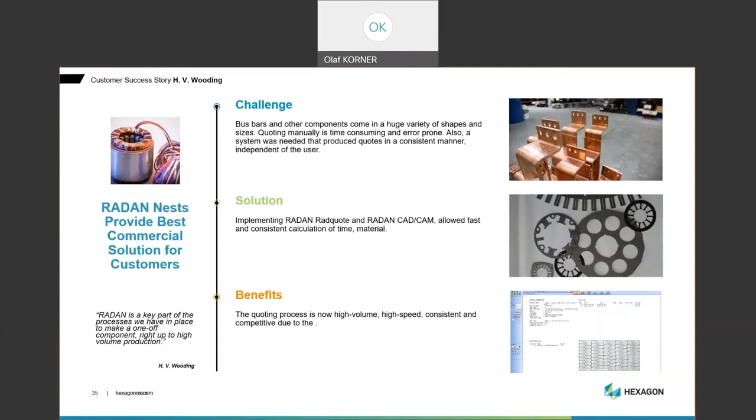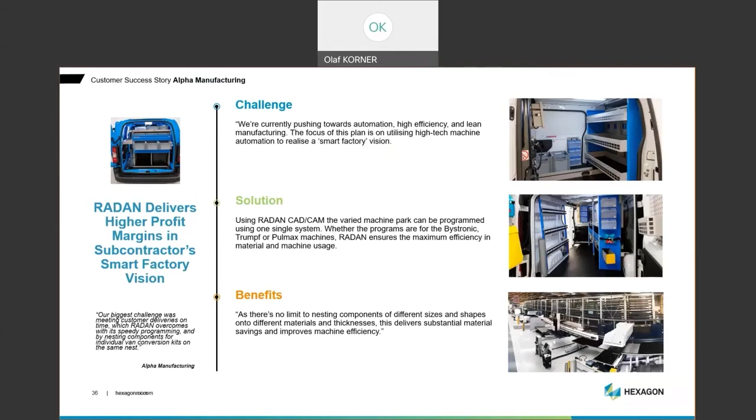Another one, Alpha Manufacturing. They actually have a combination of our products - they use punching and laser cutting in very automated cells. They make nice looking products for the insides of vans. This one is a joint customer with Hexagon Measuring Arms, EdgeCam, and Radan in use. The big advantage we offered them was material optimization, to keep the waste to an absolute minimum.

So the key benefits we're aiming for: we keep trying to optimize and make the workflow seamless for you, so you get good information exchange and a short learning curve. One of our biggest hitters is material utilization - we claim, and we've proven many times, that we have the best nesting engine in the world in this market.

The optimization of manufacturing cycle time - we make sure you cut reliably and fast on your machine, making the most of your machine time and other resources. We try to make sure your project costs go down and stay down, and keep your quality on control. In the end, hopefully everything will be faster to market, on time, and delivered to the customer to their satisfaction.